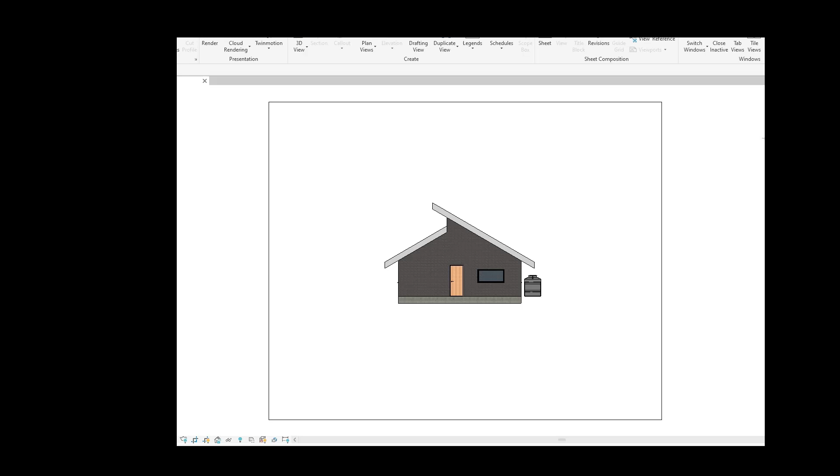The Melaleuca House by Daniel Laing, in fulfillment of AENG201 Net Zero House Design, Developed Design.

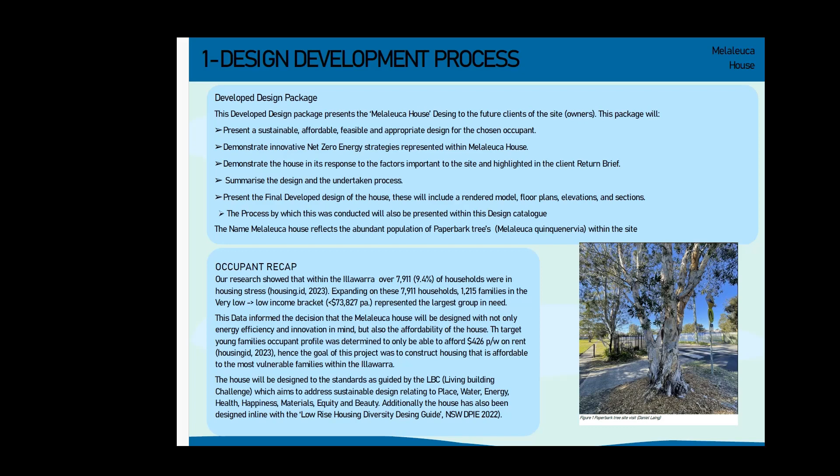The design development process was conducted over 13 weeks, with the goal of presenting a sustainable, affordable and feasible house for the chosen occupant—a young family on the lower income spectrum. The designs were conducted to achieve an affordable house for this young family in this growing region. The process was conducted over 3 stages.

Initially, a return brief was given to the client, asking for and receiving feedback on what they wanted as a young growing family on the lower income level. The second stage was early ideas, governed around the local environment, the embodiment of outdoor space within the house, and a single-story design to save on construction costs.

Finally, sketch plans were conducted, and a skillion roof was accepted as a suitable design for its benefits of thermal mass, promotion of air circulation, and its benefit in a solar panel array installation.

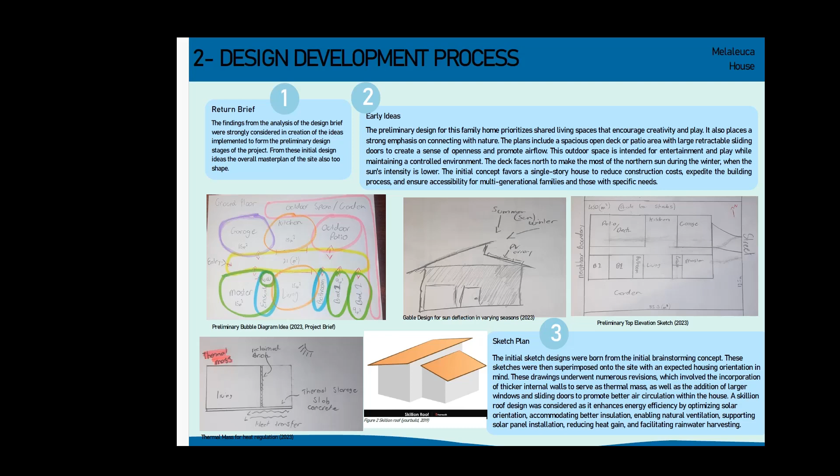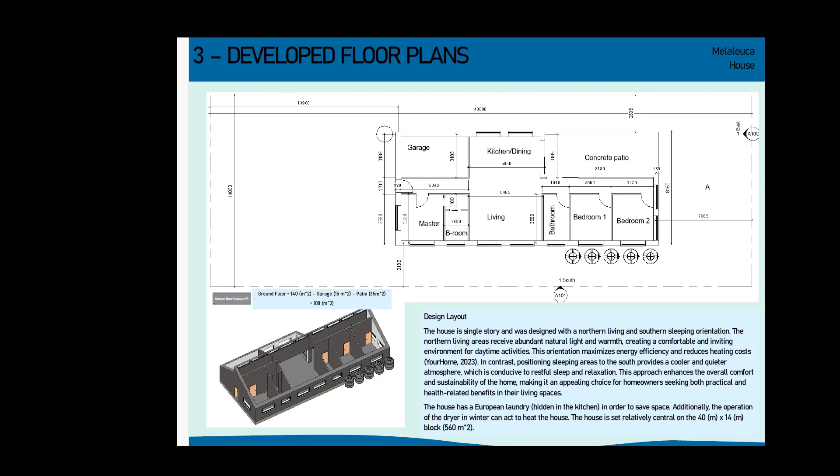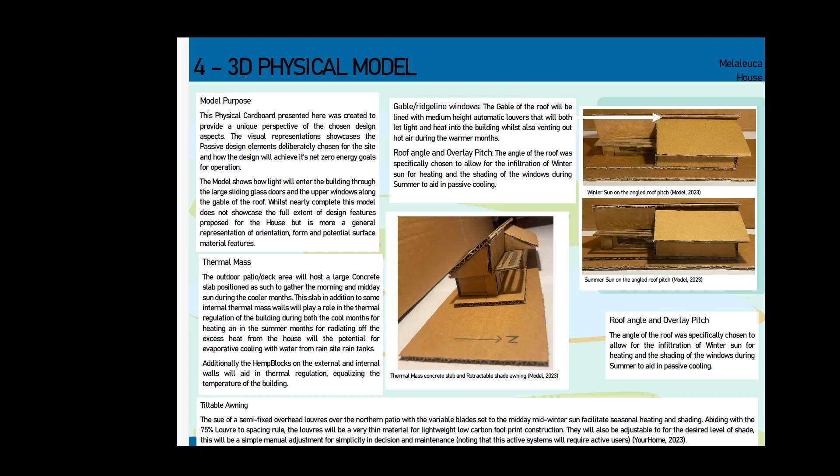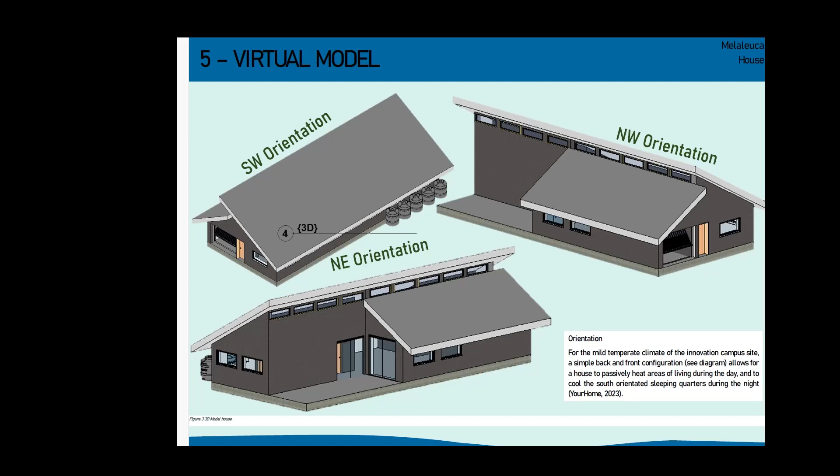This is the virtual model showing the southwestern, northwestern and northeastern orientations of the house. Considering the mild temperate environment of Wollongong, a simple back and front configuration was chosen with that skillion roof design, as mentioned before. These are the developed elevations of the house.

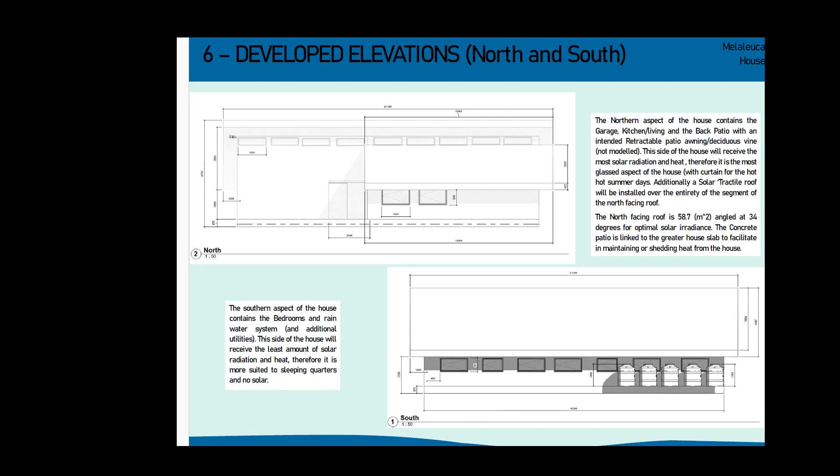The northern aspect of the house contains the living areas. This side will receive the most sun, helping to lighten up these living areas during the early mornings. This is also where the solar tractile roof will be located—a 59 square meter roof angled at 34 degrees, designed for optimal solar irradiance, whereas the south part of the house is designed for bedroom spaces.

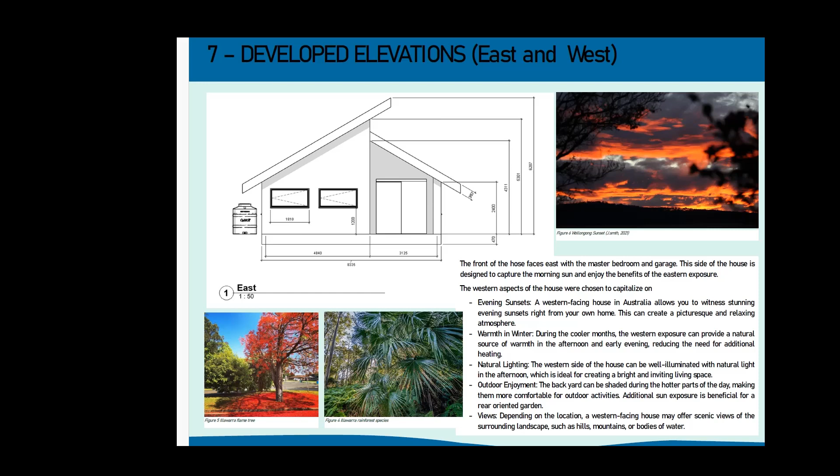Hemp block was chosen as the main structural member of the house. It offers a compelling long-term cost benefit compared to standard construction costs—it is cheaper, it can be done DIY in house packages, and it is very naturally insulative. The material for the external walls was 300mm, providing a 4.25 R value, and the internal walls used 100mm, providing 1.4, both within the parameter requirements of the local council.

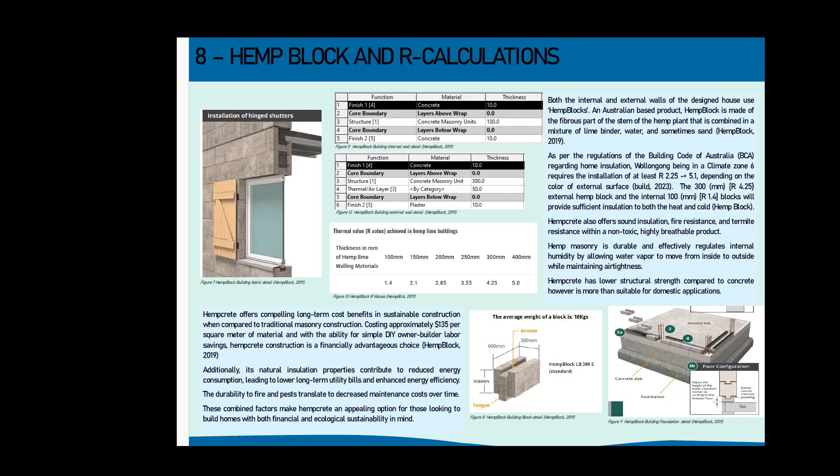Within the net zero energy design strategy, I focused on 3 areas: rain collection, solar battery storage and solar generation. For rain collection, considering the total 230 square metre house and the 1100 millimetres per annum rainfall of the Illawarra, four 2,500 litre tanks were chosen for this house to store water.

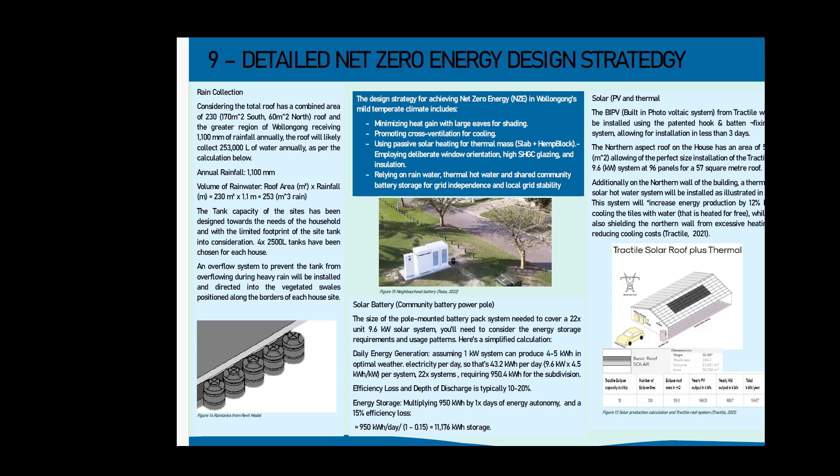Additionally, the solar generation via the tractile roof uses very efficient solar panels with 57 square metres on the northern face, leading to a 9.6 kilowatt system. Extrapolating this to the entire 22 lot subdivision, this equaled 950 kilowatt hours per day for the subdivision. Taking into consideration efficiency losses, this would require 11,176 kilowatt hours of storage.

Finally, the master plan: the north-south road orientation maximised energy efficiency capability of each house, and a swale design was implemented based on the initial water-sensitive urban design strategy as conducted by Cardno for Wollongong City Council in 2009. Some species will be installed in this to help remove nutrients and reduce water flow.